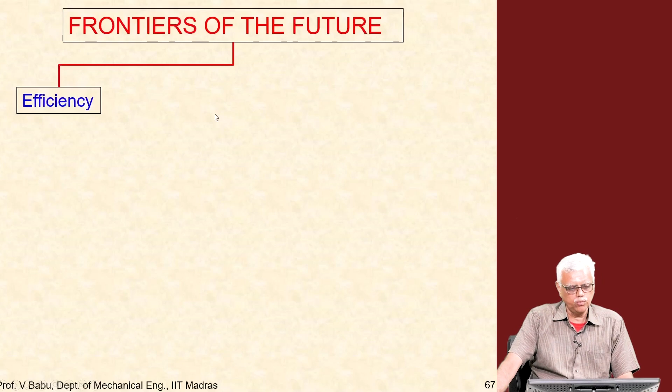What are the directions in which performance of these engines, reliability is being improved? If you look at the directions, there are two important directions. One is efficiency, and efficiency improvements are being sought in three directions. Let us take a look, then we will go through them.

Basically, efficiency improvements are being sought through better combustor designs and through weight reduction. These are the two most promising directions. We want better combustor design so that fuel economy is better, and perhaps emissions can also be improved. That is one front in which improvements are being sought.

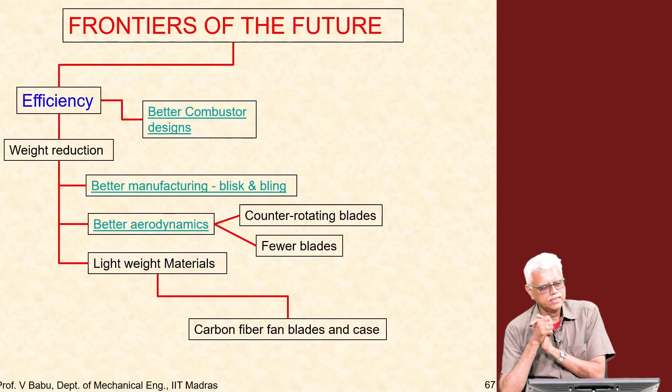The other front, of course, is weight reduction. You keep making the engine lighter and lighter, it becomes more and more economical to use the engine in the actual application. Weight reduction, as you can see, is being sought in three or four different fronts: first, better manufacturing; second, better aerodynamics; third, better materials.

It's quite interesting that these three directions essentially constitute the three verticals of mechanical engineering: thermal, design and manufacturing. That is where improvements are being sought.

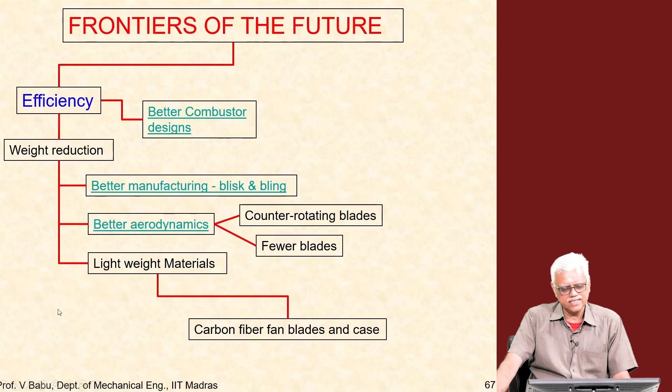So we will go through each one of these and see what the latest and state of the art designs are. The other major improvement is being sought in compliance. When I say compliance, two important things: one is emissions and the other is noise.

So the engines must have better emissions and also must be quieter, and the standards for noise keep becoming more and more stringent, because airports, although earlier they used to be outside cities, now cities are expanding so much that cities are growing around the airport, so noise requirements are becoming more and more stringent.

So these are the two major directions in which the industry is evolving: efficiency and compliance. And in efficiency, these are the aspects in which they are evolving. Let us go through them one at a time and see what improvements are already in place and what we can expect in the future.

If you look at better combustor designs, you may remember that I said the industry has now moved to annular combustors rather than the can combustors that were being used. This is one of the latest combustor designs being used in the Airbus A320neo type of aircraft with the new engine option.

This is the twin annular premix swirl combustor, which is extremely efficient. It boasts a 15% reduction in fuel consumption, consequently a 15% reduction in CO2, and a 50% NOx reduction also, compared with the earlier designs. Better mixing, better combustion, better control of the peak temperatures in the engine actually result in these kinds of benefits.

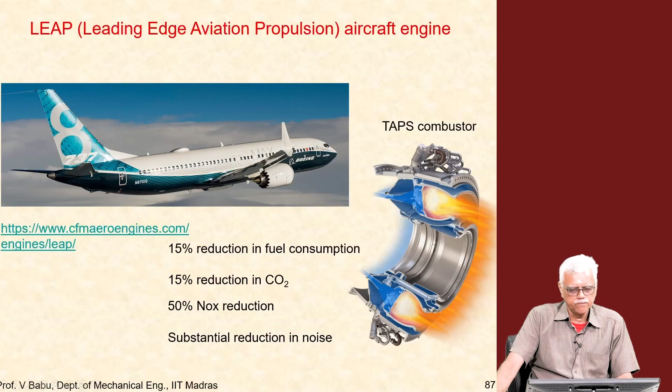Some of the interesting technology already in place in these combustors is the use of ceramic matrix composite materials in the combustor itself. Remember, the combustor also experiences high pressure and high temperature, but no rotation, which means the combustor also requires thermal protection.

It has a lot of thermal stresses, so the lining usually requires cooling, just like the high pressure turbine blades. The combustor liners also require cooling, and now they are being manufactured with ceramic matrix composites, which provide the biggest saving in reduction of weight as well as improved thermal capability. So they last longer and are lighter, making them most attractive for use in latest engine technology.

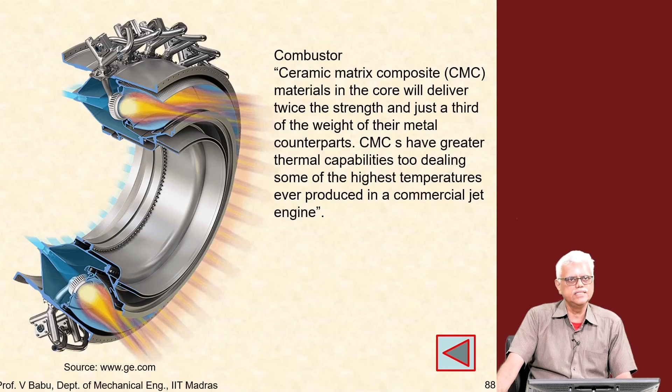So again, in the combustor, when we say combustors are being improved, it is not only in the combustion aspect of the fuel, but in the fabrication of the combustor itself, how we are able to achieve better improvements through the use of these kinds of materials, and improved mixing of the fuel, improved dilution of the air. All these things result in longer engine life and lighter components.

Now, if you look at weight reduction, this is probably one of the holy grails of aircraft engine manufacturing. The lighter the engine, the better it is. So it is being pursued on 3 different fronts, as I have shown here.

Let us look at manufacturing first. Here I have shown the conventional compressor, with the compressor disc and the compressor blades. You may recall that compressor blades may be mounted onto the disc in 2 different ways.

One way is to mount them axially, so the roots are axial. You have axial slots along the circumference of the disc, and each blade goes into an axial slot. The other way is to have a circumferential slot, where the blades are bolted onto the disc in the circumferential slot. So it is either axial mounting or circumferential mounting.

So here you see the conventional disc, which is then connected to the shaft, with the disc and blades mounted here. One of the latest manufacturing practices is to completely do away with this kind of mounting, which requires a root and then bolts to mount this onto the disc. All of this is weight.

So what is being done now is to use a component called BLISK. BLISK stands for blade plus disc, and this results in a 30% weight saving. What is done is you take the blades, and rather than bolting them onto the disc, you friction weld them onto the disc, resulting in about a 30% weight saving, which can translate into a substantial amount of weight saving.

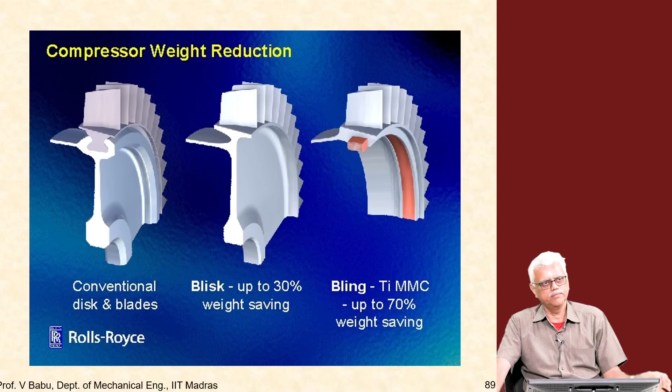Of course, better manufacturing practices mean the fan blades now are manufactured from composites, again using the resin transfer molding process. So the blades are now made out of carbon fiber, extremely lightweight and extremely strong.

And as this quote from the GE website or CFM website says, each blade is strong enough that you can hang an A350 or Boeing 787 from each blade and it will not budge. That is how strong these blades are, yet they are extremely lightweight.

They are all made of composites. One advantage, as we will see later on, is these blades are lighter, they are stronger, and the aerodynamics of these blades can also be better. So you have a double advantage when you improve your manufacturing practice and simultaneously improve your aerodynamics of the blade.

So the weight of each blade goes down, and the improved aerodynamics actually results in a reduction in the number of blades. The GE90, for example, will probably have about 24 blades, whereas the GE9X will have only about 18 blades or so. So the number of blades also goes down and the weight of each blade also decreases. You can realize tremendous reduction in weight using these kinds of improved manufacturing technology.

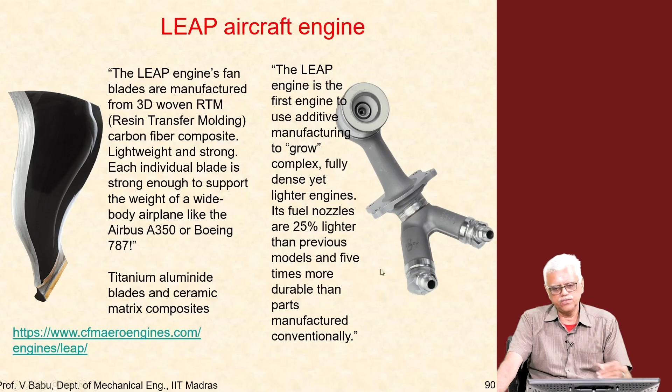The next one here that you see is a fuel nozzle, done using additive manufacturing. These parts are complex, very dense, but they are also very light. These are fuel nozzles used in the LEAP engine, and they have improved life and can also be mass produced. The manufacturing technology today is such that they can be mass produced with these very desirable properties, and these are actually in service as we speak.

Here we see turbine blades, although not in an aviation application, because this is an illustration of axial slotting. You can see the blades being mounted axially, whereas previously you saw circumferential mounting. So here you see the turbine blade.

This turbine blade is currently installed in a 13 megawatt gas turbine stationary power plant. You can see the hollow blades, where the air used for cooling comes in, and these blades are manufactured entirely using 3D printing. These are already in service. Siemens manufactured these blades, and they are already in service in one of the stationary gas turbine power plants.

So again, this technology, additive manufacturing, 3D printing, has come a long way, where we can now manufacture these kinds of complex components like the fuel nozzles or the turbine blades with internal cooling passages, with ease of manufacturing. A great deal of precision and intricacy can be maintained, along with durability and strength, and these components can also be mass produced. That is where we are headed.

These are all the special alloys that are required for manufacturing the turbine blades.

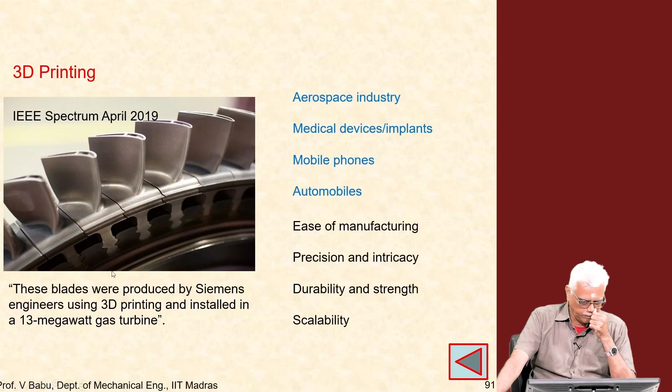So we now look at better aerodynamics, what has been done, for example, in the latest GE engine, the 9X. Some of these features are actually quite astonishing. These engines have an 11-stage compressor with a pressure ratio of 27 to 1, which roughly works out to a pressure ratio of about 1.4 or 1.5 per stage, which is quite high, and an overall pressure ratio of 60 to 1. Earlier engines used to have, or even smaller ones still today have, ratios of 40 to 1, which is considered quite high, but now the bigger engines have gone to pressure ratios of 60 to 1 to improve thermal efficiency.

So the thermal efficiency of the engine depends, in some power, but generally depends on the pressure ratio and the peak temperature of the engine. The higher both of these are, the more efficient the engine will be.

So a lot of work has gone into designing the compressor blades and stages to make them more efficient, better resist compressor stall, and so on, much more compact. As the aerodynamic efficiency increases, the number of stages will also come down. As the number of stages comes down, you can remove a set of rotor blades numbering probably 100 or so, and a set of stator blades again numbering 100 or so, and the weight comes down.

So small gains in the pressure ratio in one rotor blade passage will translate into large gains in terms of large savings in weight.

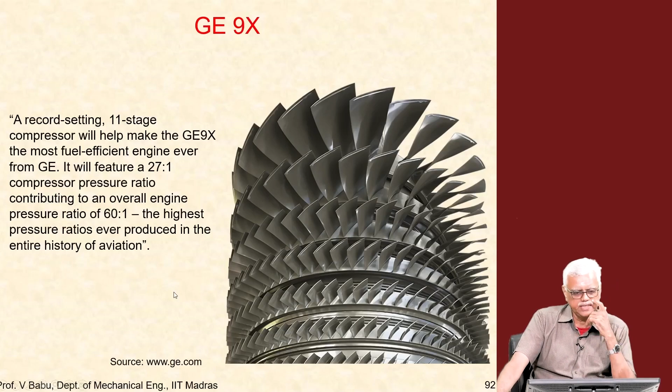So turbomachinery is an extremely critical and important aspect of aviation engines. The other thing, as I mentioned, the fan blades, not only are they being made with composites now, the aerodynamics of these blades is also much better now. Because they are much more efficient, the number of blades required for a given amount of thrust will also decrease with improved aerodynamic efficiency, again resulting in weight savings in the overall engine compared to the titanium blades that we saw earlier.

The titanium blades generally are bigger, and the composite blades are lighter and much more efficient today. This is what is used in most of the big engines, whether GE or Rolls Royce. Most of the biggest engines use composite fan blades, and now even the medium bypass ratio engines have started using this, because the weight gains translate into tremendous savings in fuel. That is the most important consideration.

As you can see, the blade profile is highly complicated, because if you remember the velocity triangles I showed, the relative velocity goes from being subsonic at the root to supersonic at the tip.

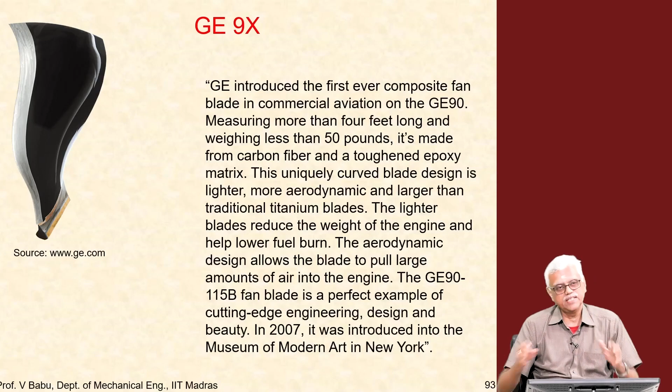Then there are performance improvements in the low pressure turbine. Of course, all this information has been sourced from GE - I am merely reproducing it here for your knowledge.

Again, the low pressure turbines have a lot of aerodynamic improvement, because if you remember, the low pressure turbine is the part of the engine where it really increases in size, as the flow is expanding a lot. So as the engine increases in size, the circumference increases and the number of blades increases. Any improvement in aerodynamics here will result in a lot of weight saving, because each ring of blades will typically have about 200 to 250 blades.

So even small improvements in aerodynamics, if you can remove one stage, will result in tremendous savings in weight. A lot of work has gone into improving the aerodynamics of the low pressure turbine and also reducing the weight, because there are so many blades. Reducing the weight of each blade also results in significant savings in weight.

So the blades are now made of titanium aluminide, which I understand is a metal matrix composite blade. A lot of weight has gone down - as you can see here, about 400 pounds, which works out to about 200 kilograms of weight saving per engine. That is a lot of weight to be carried.

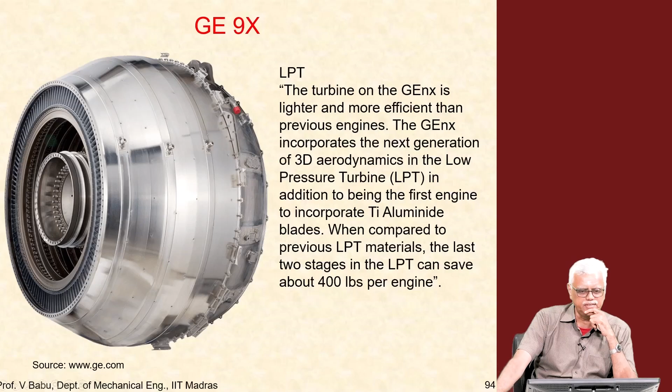So a lot of interesting technology is already in place - this is state of the art. Actually, the video here summarizes some of these things. I will highlight a few more things as we go along.

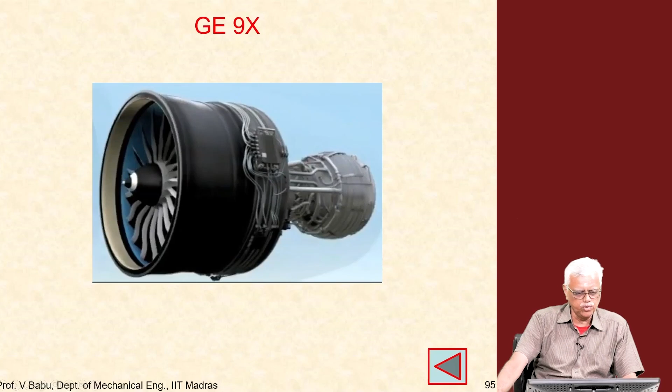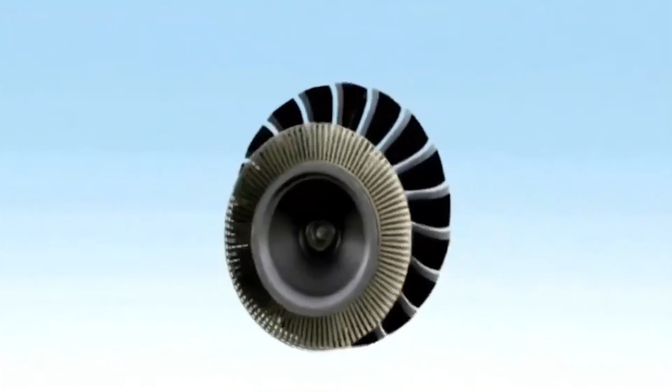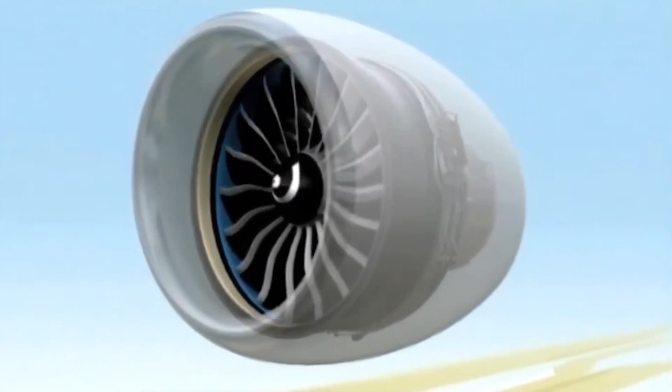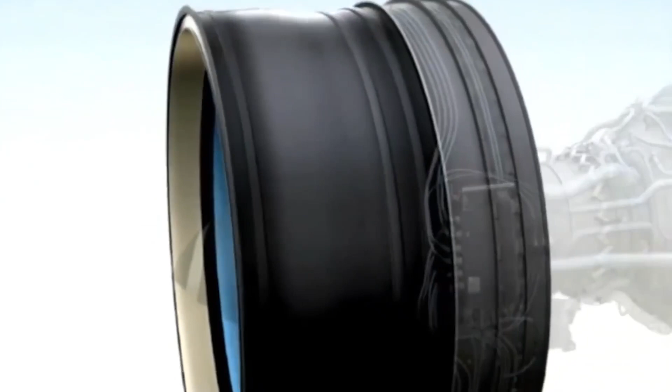Designed to power the next generation of long-range aircraft, the GEnx is the most advanced commercial turbofan in our history. A culmination of more than 60 years of inspired design, the GEnx refines the best technologies and systems of our successful engine families to deliver a whole new level of performance for aircraft such as the Boeing 787 Dreamliner. Let's take a quick look at some of this engine's most striking innovations. One unique feature that sets the GEnx apart is its expanded use of composites in the fan module. These materials are light, durable, and incredibly strong, and have been proven in service on GE90 fan blades. We have extended our success with these materials to the GEnx fan case, making it lighter and more durable. Aft of the fan is the low-pressure compressor. As with many components in the GEnx, it incorporates the latest 3D aerodynamic improvements, as well as a debris-rejecting system to keep foreign material from entering the compressor.

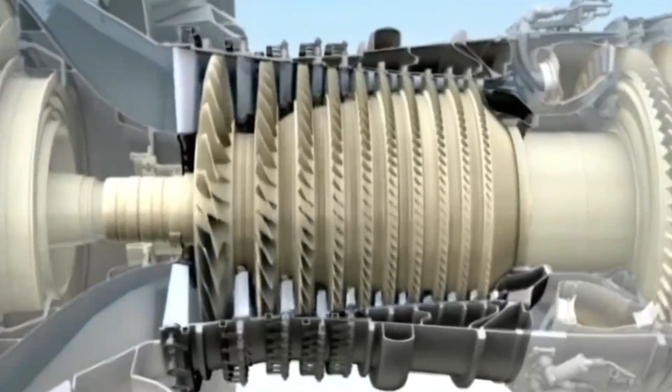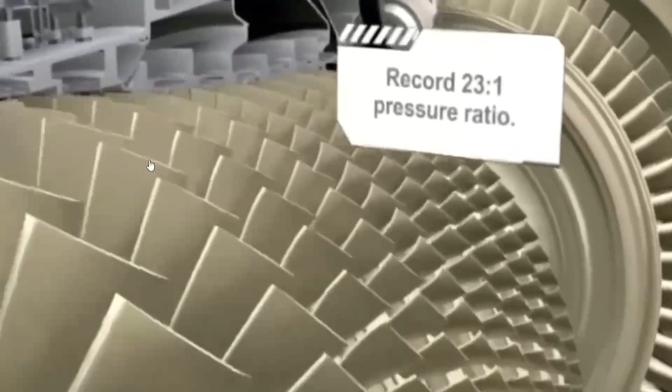It features a 10-stage high-pressure compressor that uses 4 fewer stages than the engine it replaces. Fewer stages mean fewer parts and lower cost. This efficient compressor delivers an astounding 23-to-1 pressure ratio, while providing the same stall-free operation GE is known for.

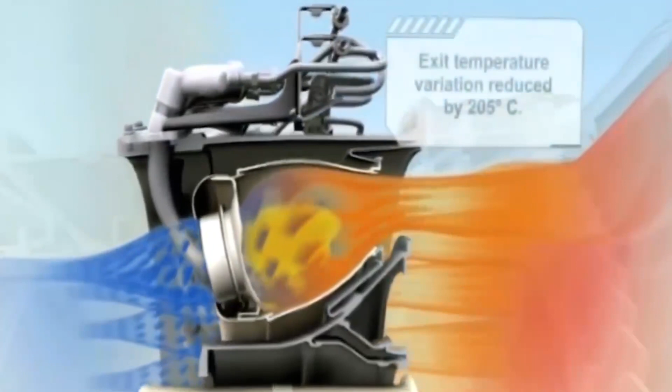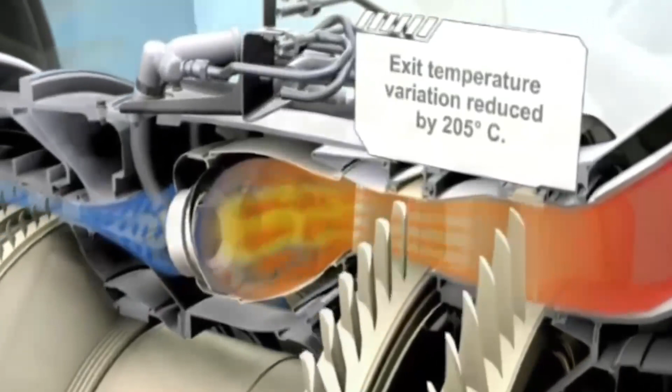If most combustors operated at the record pressures inside the GEnx, the flame temperatures would be unacceptably high and would not keep NOx generation at low levels. Not so with the GEnx, which features an advanced TAPS combustor in development since the year 2000. This combustor keeps temperatures low by utilizing lean burn combustion and a more uniform gas stream temperature profile, reducing the thermal impact on downstream hardware.

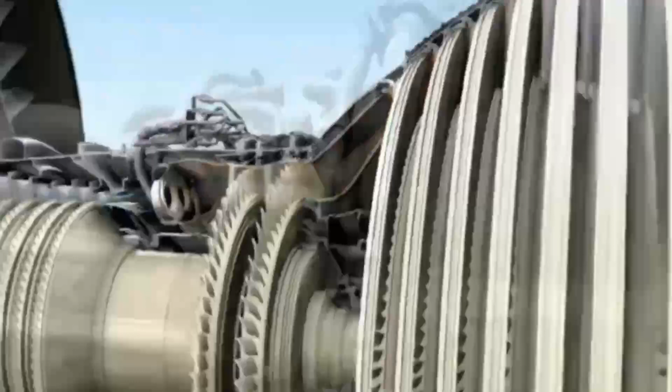Turbines extract energy from the core flow. By utilizing our advanced design codes, fewer blades can now do more work.

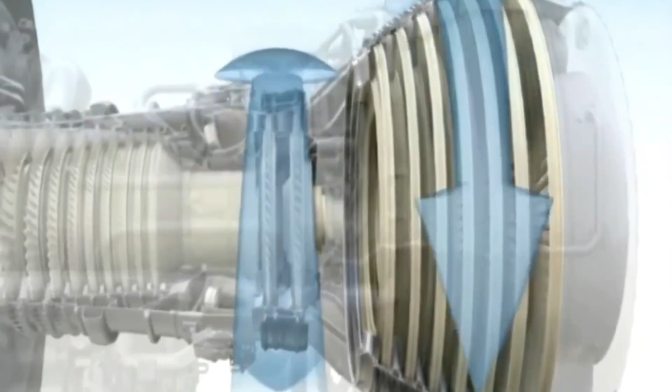In addition, a counter-rotating... so this is very interesting, I will mention this later. One of, probably in addition to a lot of inspirational design changes on the turbomachinery side, this is actually very interesting.

Notice that the GE engine has 2 shafts. One is the N1 shaft which is connected to the fan, the other is the N2 shaft. So this is the N1 shaft, this is the N2 shaft. Notice that the N1 and N2 shaft rotate in opposite directions.

This is very important, because each rotor stage can accomplish only a certain pressure rise, because if you make it too high, the flow will separate and you will have compressor stall. So for the flow to go smoothly from one rotor stage to the next, you need a set of stator blades which will accept the flow from here and divert it so that it enters the next rotor stage smoothly. Flow has to be redirected.

The stator plays only the role of redirecting the flow, but it also adds to the weight. What is interesting is, if the rotors rotate in opposite directions, then the redirection is not required. It will automatically go smoothly from one to the next. You can arrange it so that it goes smoothly from one to the next. If you look at the velocity triangles, you can see how that happens. Here, by doing this, they have eliminated one entire stage of stator blades, and more perhaps. So the reduction in weight is substantial. That is what the counter-rotating blades offer.

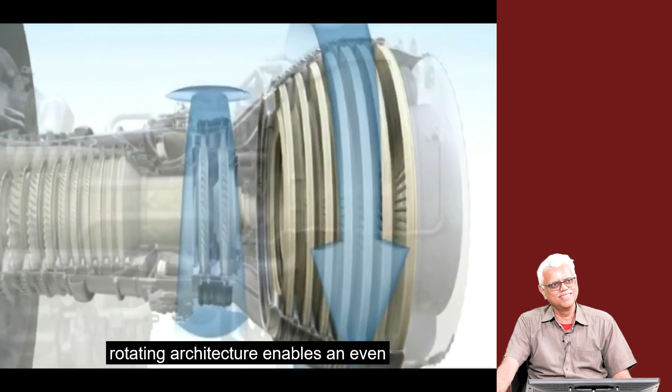That is a very significant advancement in turbomachinery design, which is also the reason why we have not been able to recruit faculty members with specialization in the turbomachinery area. They are all taken up by the aircraft industry.

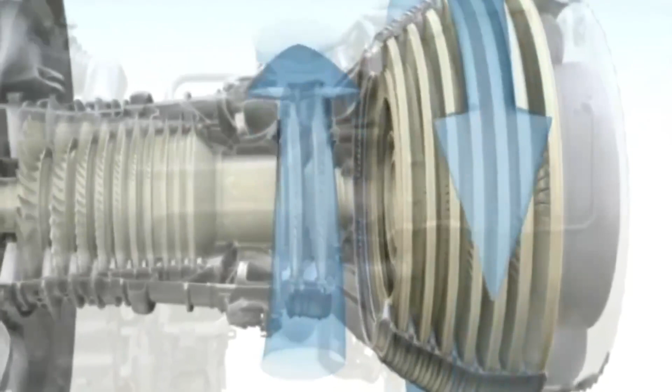This architecture enables an even more efficient extraction, allowing for a 10% part reduction in select stages. All of these technologies have come together in one engine, providing maximum value and operating efficiencies, making the GEnx a standout among aircraft engines. Even when it's in the air, the GEnx is under the microscope.

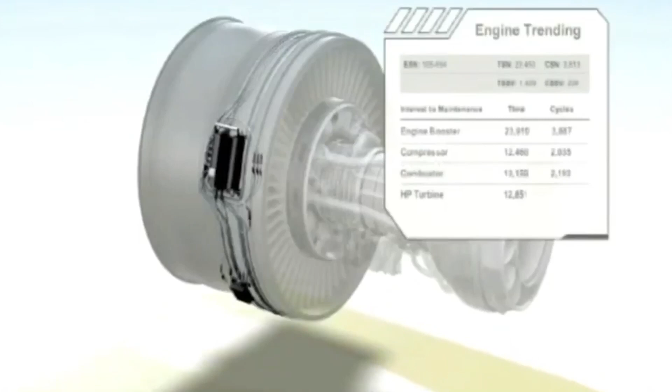By using integrated diagnostic technology, the engine can monitor its own condition, diagnose faults, and track performance history - all critical data for optimizing engine value. When this engine has to come off wing, it employs an innovative modular maintenance concept designed to deliver significant savings in time and cost.

The engine easily splits into 2 modules, the fan and the propulsor. When the time comes for maintenance, the propulsor can simply be removed and replaced with a spare one.

The GEnx is a giant leap forward. It takes advanced, proven technologies and combines all of them into one efficient, reliable turbofan. It is the first great engine of the 21st century. It is imagination at work.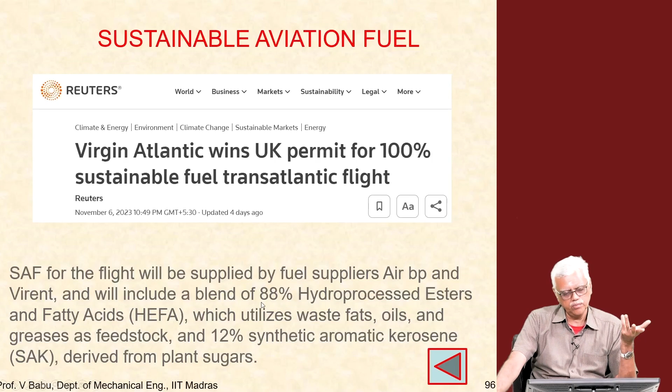If it is possible to generate large amounts of fuel, apparently these companies Air BP and Virent have the capability to supply large quantities of the fuel. So this will actually mean a leap forward in having sustainable fuels. Hopefully it will result in reduction of emissions also, but there is a long way to go in reducing emissions from aircraft engines. The fuel economy improvements have been very good for the aircraft industry, but still a lot of work needs to be done for improving emissions.

On the noise front, propellers are very noisy due to mechanical reasons. Turbojets were extremely noisy because the entire thrust is generated by the jet, which generates a lot of aerodynamic noise as it mixes with the air. Turbofans are quieter compared to turbojets because 75 to 80% of the thrust is generated by the fan stream, which does not generate so much noise as the turbojets, but still they generate a lot of noise.

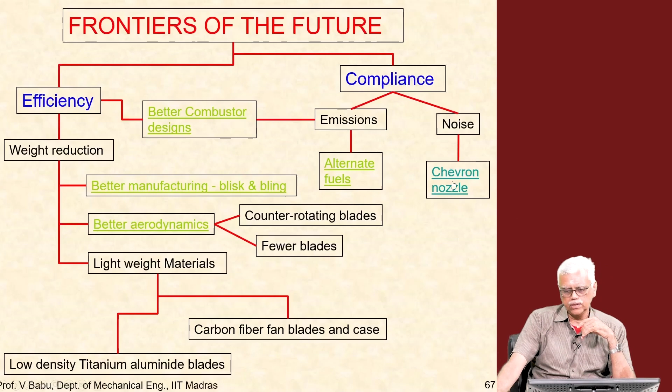One way of reducing noise used in these engines is the so-called chevron nozzle. By having chevrons in the trailing edge of the fan nozzle, and you can also have them in the trailing edge of the core engine nozzle, this reduces the mixing noise considerably. This is a very interesting fluid dynamic aspect that is used.

You have to be very careful with the chevron design. There are many different things that are possible. Basically the chevrons are triangular cutouts from the trailing edge, so you have triangles, then a cutout, next triangle, and so on.

The basic design parameters of the chevron are the chevron length and the chevron angle. The chevron orientation can coincide with the nozzle itself, or you can slightly make it protrude into the nozzle stream. So you can have chevron length, chevron angle, and the number of chevrons along the circumference. These are the parameters that control the performance of the chevron.

Depending upon combinations of these parameters, the chevron can actually make the engine noisier, or for an optimum combination it can make the engine quieter. We have studied the aeroacoustic performance of the chevrons. One of my PhD students studied that, and we elucidated the fundamental mechanisms of noise reduction by the chevrons. It is a very interesting concept, and there are some optimal combinations which can result in noise reduction by as much as 50% or so. That is why it is quite extensively used in aircraft engines nowadays.

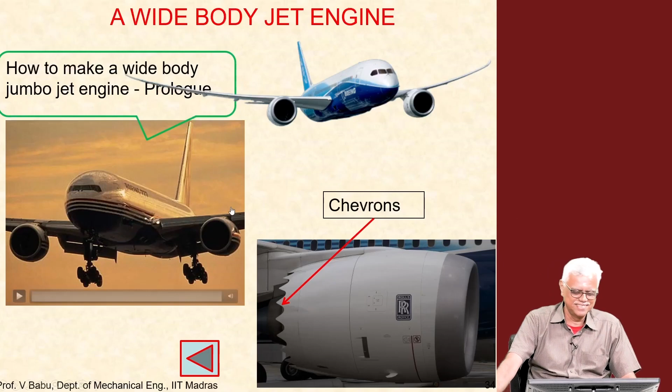Okay, so now we are looking at future technology. What is in the pipeline, what we can expect maybe in the next 5 to 10 years. Of course aerodynamics is not within the scope of our discussion, but I still thought this would be interesting to show based on what we have seen. The Boeing 777X is an aircraft currently being developed, probably coming into service maybe 5 years from now, that is generally what is expected. Now, as I said, we have completely done away with 4-engine and 3-engine airplanes. Now all the aircraft, both single aisle and two aisle, have only 2 engines. Different versions of this aircraft increase capacity by stretching the aircraft rather than making them bigger.

So you are stretching them, but even then there is a demand for making them even bigger, not to the extent of making two decks, but still it will be better to have more efficient, longer range, ultra long haul flights. In that sense, Boeing has come up with this very interesting aircraft, which has folding wings, which is very interesting.

The 777X will still be accommodated in the same gate as it is now when it's coming down, but when it is in flight, it has longer wings, hence a longer range, and can carry more people. So we can take a look at this technology, it's quite interesting. Let us see. I did a screen grab from this.

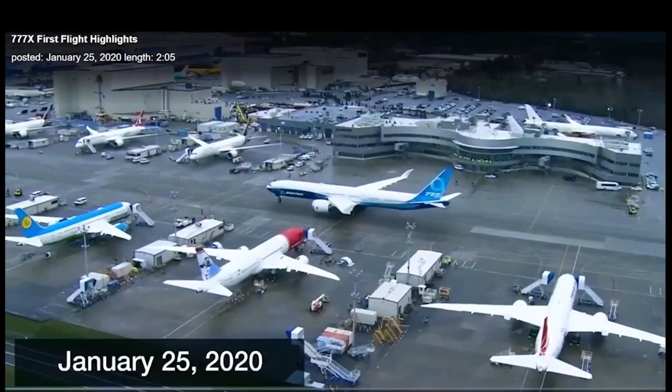Hello to all of you guys watching on Boeing.com. We are live in Everett, Washington, just north of Seattle, for the Boeing 777X first flight. It looks like the skies are gray today, but today the conditions are a lot better. There were about 8,000 employees joining us yesterday on the flight line here. It's unfortunate we weren't able to fly yesterday, but safety is a priority here at Boeing. As you mentioned, it's looking a lot better today.

Already 8 world-class customers have purchased this aircraft so far: ANA, British Airways, Cathay Pacific, Emirates, Etihad, Lufthansa, Qatar, and Singapore. A huge thank you.

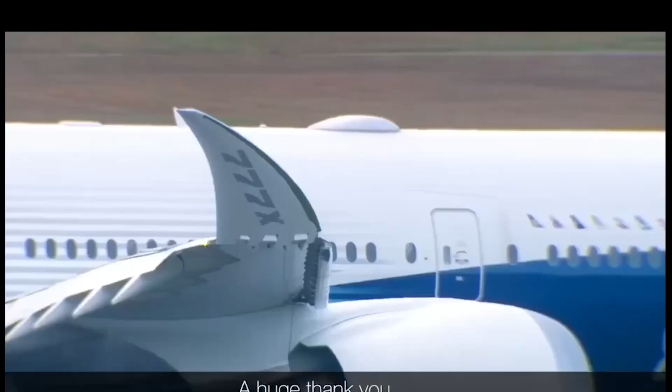As the aircraft goes onto the runway, the folded wings come down, so it has a longer wing. Until then, it should have a folded up wing so that the wingspan is the same.

This is spectacular. I'm proud of all the employees that put their heart and soul into this. It takes an effort across the company. The 777X, with its long range capability and increased capacity, is going to really change the world one more time.

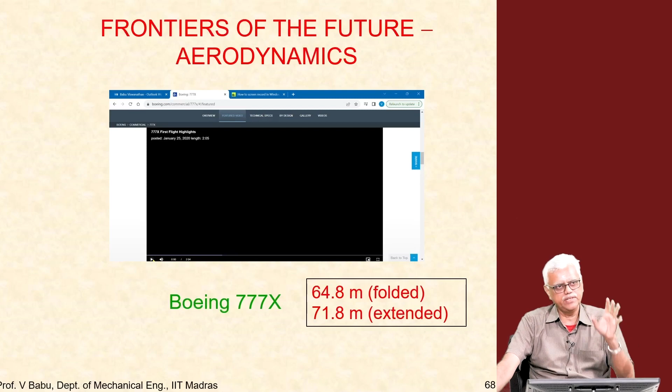Now you can see the wings folding up again, as you can see here, so it meets the gate requirements. The wingspan is actually 64.8 meters, same as the existing 777, but when it is extended, it increases in length by about 7 meters or so.

Go ahead, Nasim. There seem to be some things which are permanently there. That is in the 737, those are called winglets. Winglets improve the performance of shorter wings, but Boeing does not use winglets in bigger aircraft like the 777 and 787. I don't know, maybe Airbus does.

Instead, they use what is called a raked wingtip design, which gives a much better aerodynamic performance compared with the traditional design. But the 737 and the Airbus A320 have winglets which, if my memory serves me correctly, reduce the overall drag by about 5 to 6%, which is considerable for an aircraft of that size. It can result in substantial fuel savings.

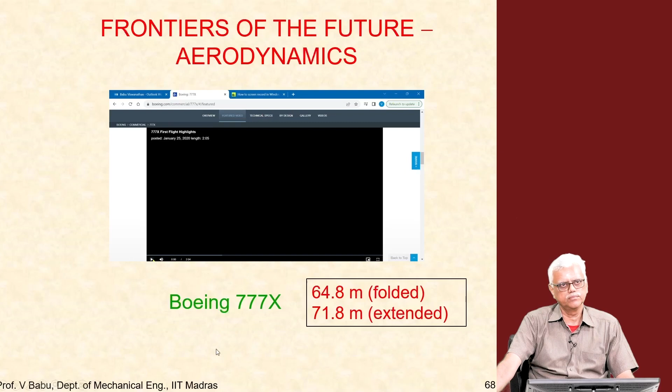So on the engine side, on the propulsion side, what can we expect? If you look at the trend so far, we started with turbojets, then a zero bypass turbofan engine, then low bypass turbofan engines, and then high bypass turbofan engines. Now we are at very high bypass ratio turbofan engines. The GE90 and other engines typically have bypass ratios of 12 or so. So the way the trend is going, it seems we keep increasing the bypass ratio, and next we will go from very high to ultra high bypass ratio engines.

But the downside is very nicely captured in this graphic below. As you increase the bypass ratio on the x-axis, you can see the drag comes up - the frontal drag goes up, thrust capability and weight change, and integrating the engine with the airframe becomes very difficult, causing structural difficulty, and weight also increases. So there is a lot of downside beyond a certain point.

However, on paper, at least in theory, as you increase the bypass ratio, the thrust specific fuel consumption becomes better, and the noise also becomes better as we go along. So on paper it is desirable to keep increasing the bypass ratio, perhaps go to ultra high bypass ratios, but in implementation you encounter difficulties once the bypass ratio goes beyond a certain value.

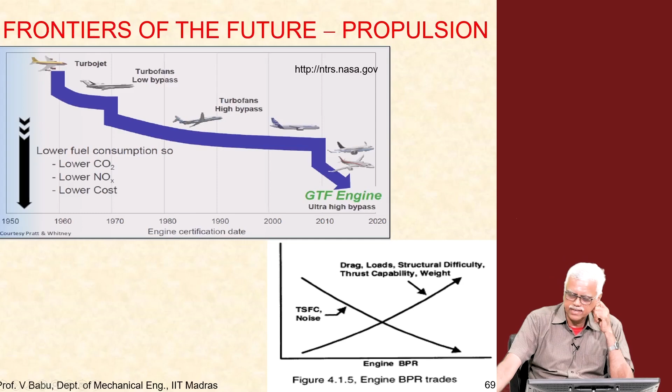We probably are at the limit of that value now with our aircraft. So, the next improvement, or paradigm shift, that is required is to go to what is called a geared turbofan engine. The idea behind that is something we will see, but before that, let us take a look at the effect of bypass ratio. As you keep increasing bypass ratio, what sort of difficulties will you encounter in actual aircraft?

I have picked the Boeing 737. This is the Boeing 737 original with the turbojet engine. We are basically going through the same sequence we saw in the previous graphic, what happens as the bypass ratio increases. Here we have a turbojet with zero bypass ratio, and you can see the engine underneath the wing, with the exhaust coming out of the trailing edge of the wing. So you can see how the trailing edge of the engine coincides with the trailing edge of the wing, and the exhaust comes beyond the trailing edge of the wing. That was how engines were mounted in those days, turbojet engines with zero bypass ratio.

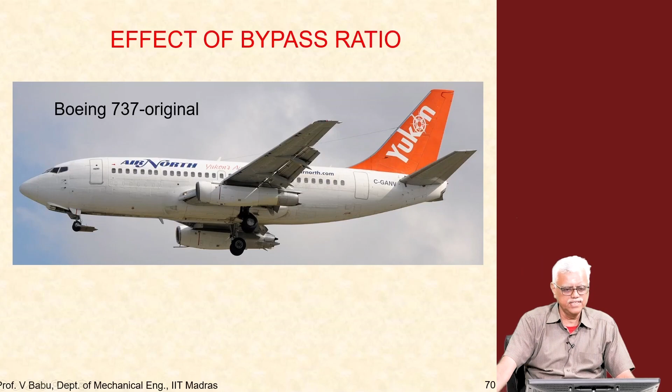Now, as the bypass ratio increases, the engine becomes bigger, so it can no longer sit underneath the wing. This is the next one, the Boeing 737 Classic. Now you can see how much the engine has come out. The engine has moved forward, and the trailing edge of the engine was even forward of the leading edge of the wing. Earlier, the trailing edge of the engine was in line with the trailing edge of the wing. Now the trailing edge of the engine is even further forward compared to the leading edge of the wing itself. That is how much it has moved forward, and that is inevitable when you have a high bypass ratio engine.

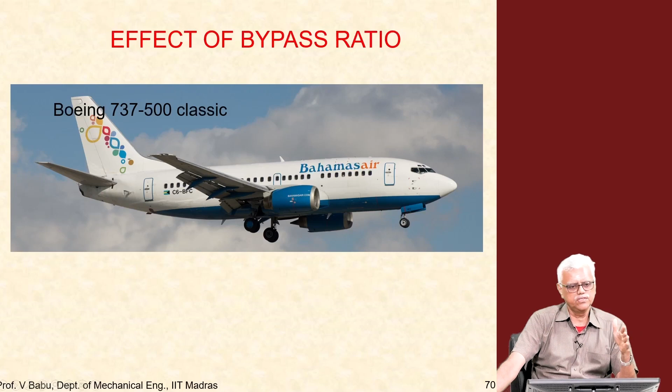This is actually a mid-size, narrow aisle, single aisle narrow body aircraft, but even here we now have medium bypass ratio engines which are reasonably big. So this has come forward. We went from Boeing original to Classic. The next one is the so-called Boeing NG, next generation. Here the engine is even further forward compared to the Classic. You can see how much it has come up, and the NG also features winglets for improved aerodynamic performance.

In fact, this engine is so far forward that the GE engine would not meet ground clearance requirements. So the bottom of the fan casing had to be flattened in order to make the GE engine meet ground clearance requirements, because the airframe is the same. For the 737, Boeing has not really changed the airframe since the original. The original airframe sat low to the ground, because in those days baggage had to be handled manually. The belly of the plane opens up and baggage handlers take the baggage out and load it on carts. It was very good, but today it is not done like that, though the airframe remains the same.

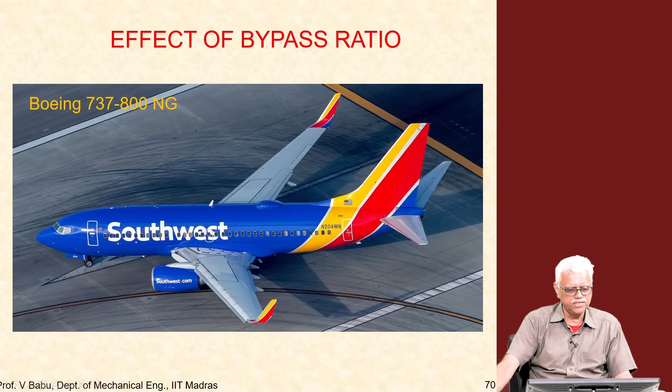So when that happens, you have other constraints like this. Now the latest one, 737 MAX, the engine is even bigger than the previous ones and farther forward compared to the other one. The engine keeps moving inboard and then keeps moving forward. I am showing this to illustrate what can happen when you increase the bypass ratio. On paper, increasing bypass ratio is very desirable, but integrating such engines with the airframe becomes very difficult. Practical challenges like this make it very challenging. You can also see chevrons even in these types of engines nowadays.

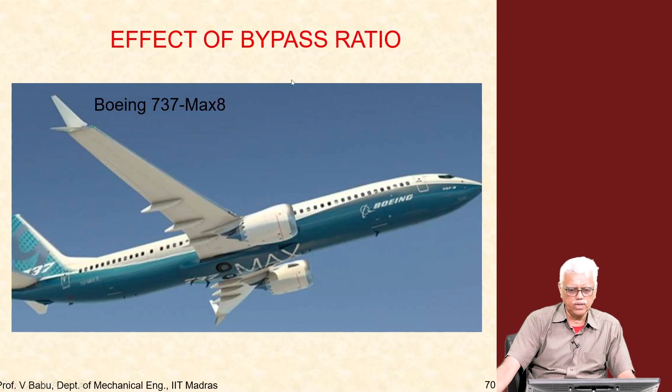So those were the considerations which led Boeing to choose this engine and then choose this sort of integration with the airframe. But the problem is, when you have such a big engine so forward and so inboard, aerodynamically there is a tendency for the aircraft to always pitch up, because it is producing so much thrust and is so far forward, there is always a tendency for the nose to come up.

This was noticed during test flights, and so Boeing designed a software called MCAS, Maneuvering Characteristics Augmentation System, which would automatically adjust the trim tabs to keep the aircraft in level flight.

But the problem is the software does it automatically, and there are times, especially when you are taking off, when you want the nose to be up as it climbs. So that's where this got into problems. The software tries to push the nose down at the wrong time, because it senses the nose is too much up, and then the pilots are trying to pull up the aircraft, and there is a problem. You are not able to disconnect it, and you are also close to the ground, you don't have altitude to work with, and eventually this led to 2 of the crashes that we saw, and the Boeing 737 MAX being taken out of service.

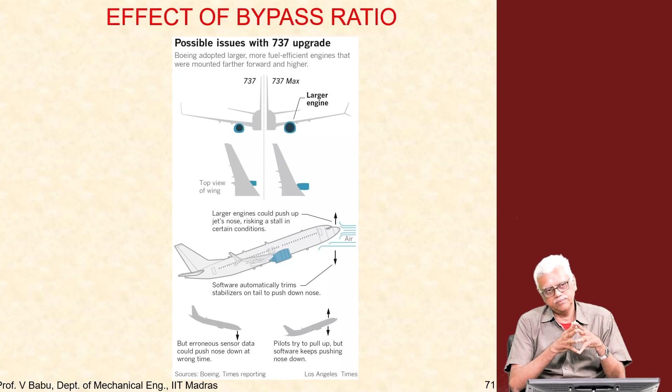So this is the effect of bypass ratio. On paper, it may sound great, but in practice, integrating such designs into aircraft becomes more and more difficult, which is why the industry's tendency to go for higher and higher bypass ratios, in my opinion, has probably hit the limit. I don't think we can go with current engines to increase the bypass ratio further.

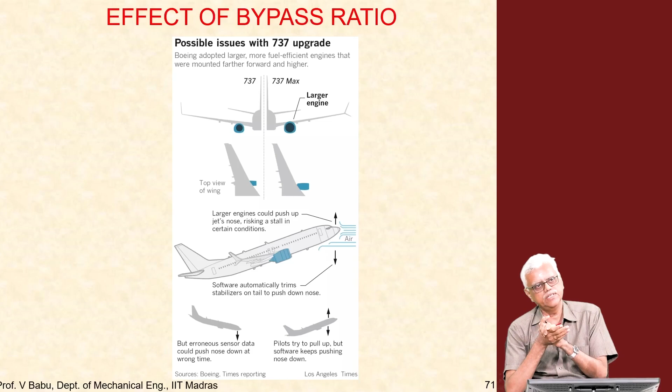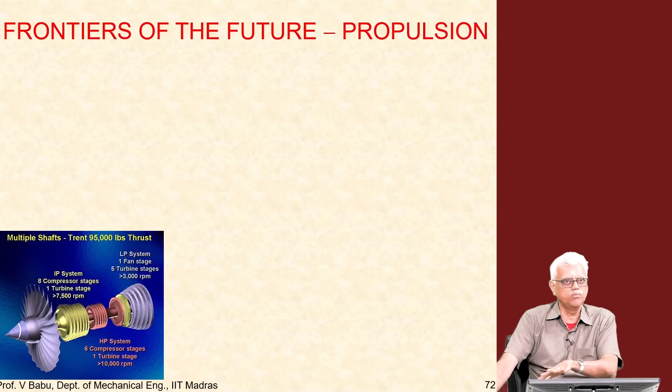So where do we go next if you want to reduce the speed further? The only way to do it is something someone already suggested - why not have a gearbox between the low pressure turbine and the fan? That technology is called the geared turbofan technology. So you have a gearbox between the low pressure turbine and the fan alone.

So basically what we have today are the so-called direct drive turbofans, because the fan is directly coupled to the low pressure turbine without any gearbox in between. Now you put a gearbox between the low pressure turbine and the fan. The low pressure turbine can actually run at a higher RPM, which would be more optimal. So the disadvantage of the direct drive is the fan is spinning at a speed faster than its optimum speed, and the low pressure turbine is spinning at a speed less than its optimum speed.

So by using a gearbox, you can allow the low pressure turbine to operate at its optimum speed, and the fan also to operate at its optimum speed. If you do that, the fan efficiency increases, so you can actually have lower fan pressure ratios. For the same performance, for the same thrust generation, you can have lower fan pressure ratios, and you move up on this curve in terms of efficiency, and you go to the left in terms of fan pressure ratio. So for a given thrust, you can have lower pressure ratio, or for the same pressure ratio, you can generate more power.

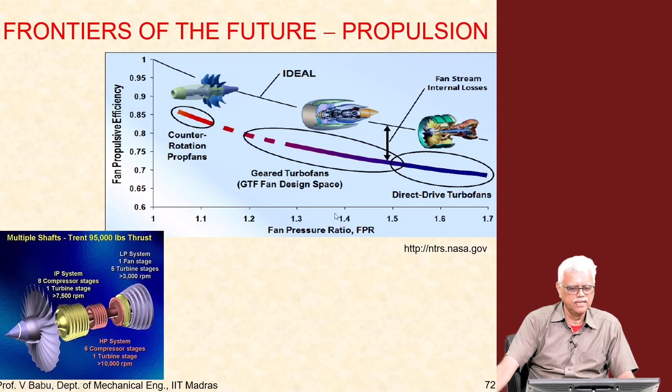So that is what a geared turbofan would allow you to do, but it is still very challenging.

For example, because the fan pressure ratio decreases and the fan efficiency increases, the fuel burn will probably go down by 20 to 25%, maybe around 20% compared to today's engines. This is because the amount of fuel you burn for a given thrust generation will go down due to the increased efficiency of the geared turbofan. The noise also goes down because it is now spinning at a lower RPM. The fan produces the maximum noise, and fan noise is actually among the highest contributors to noise from a turbofan engine, so that will also go down. So you get better compliance, both for emissions and for noise, if you use the geared turbofan.

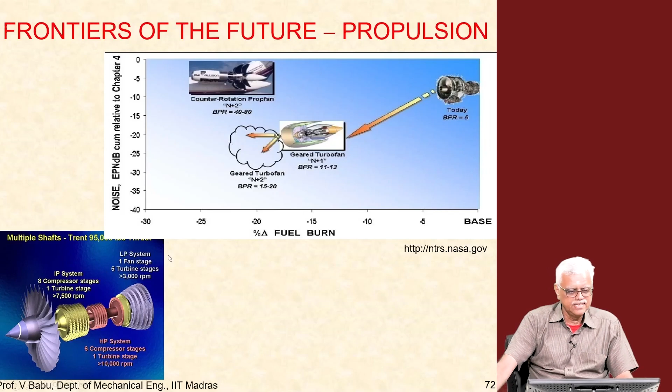The fan now spins at a slower speed compared to the earlier direct drive turbofan. Because the RPM is less, you can actually have higher bypass ratios, increase the diameter, and even with the increased diameter, because the RPM is less, you can still have low tip speed, and you can also have low pressure ratios because the fan efficiency goes up. The fan efficiency goes up, we can have low pressure ratios, and we can also increase the diameter because the fan RPM has come down. So this is cutting edge technology that is being used today.

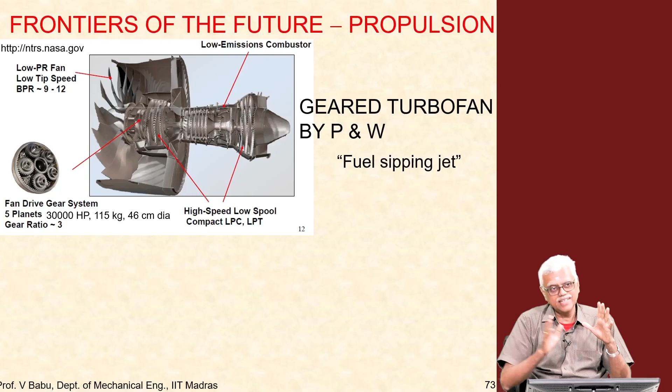Although I must add that Pratt & Whitney has put this engine in service, and interestingly enough, although the engine has been having a lot of issues, a lot of off-wing issues, all kinds of problems, apparently none of that has to do with the gearbox - which is what one would think to be the most vulnerable, right. None of the issues these engines have has to do with the gearbox, at least as far as I can read today. The problem is all elsewhere in other parts of the engine, but nothing in the gearbox, which I find extremely impressive - how you can have a gearbox like this and still have a noise benefit. I do not understand this particular technology, but I can understand why the geared turbofan will work better, although not how it has been accomplished in the actual engine.

So most of the Indigo aircraft in service today use the Airbus A320neo with the Pratt & Whitney engine, which supposedly gives a 30% fuel burn advantage for these aircraft.

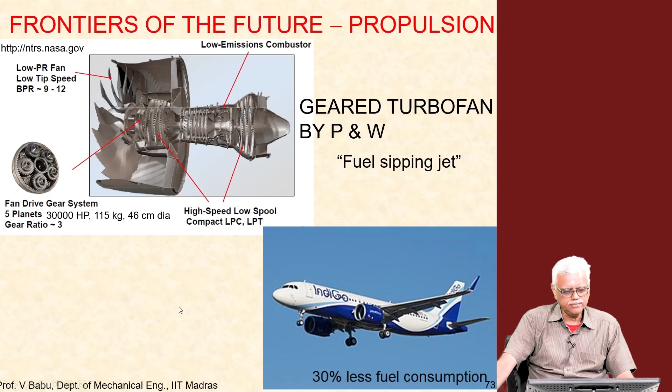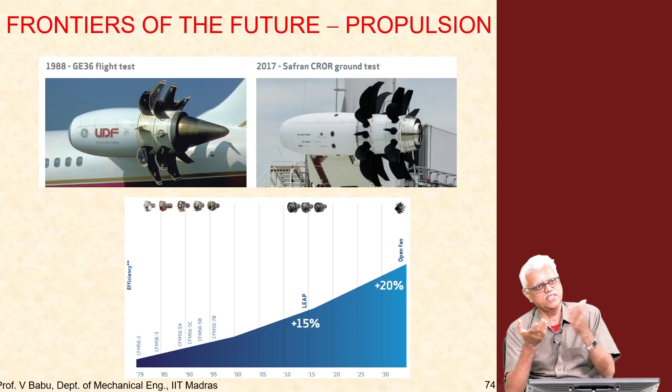We are going back to this because technically on paper it has a bypass ratio of almost infinity, or something like that. These engines typically have a core turbojet engine here, as you can see, with bypass ratios probably around 50 or 60, very ultra high bypass ratio. But we are going back to this sort of architecture because of the improvements that have been made in existing engines.

Remember we talked about better aerodynamics, better manufacturing practices, better materials. All those improvements have now been brought into the open rotor architecture that you see here. So these blades are made of composites, they have better aerodynamics, and so they are less noisy. It is counter rotating.

The counter rotating architecture reduces the aerodynamic noise tremendously. These blades would still be very noisy with only one rotor, but with counter rotating rotors, the flow goes through the first rotor and undergoes a change in direction, then the second rotor rotates in the opposite direction and straightens the flow back again. So it produces increased thrust and also less noise with the counter rotating. The aerodynamic noise decreases as you do this.

So it is supposedly quieter, but in terms of efficiency and fuel gains, the LEAP engines we talked about give about a 15% advantage compared to earlier architectures. Now, we supposedly have from the LEAP engines a 20% improvement in efficiency, depending on what metric you are looking at, whether it is fuel, emissions, or noise, whatever metric you choose, you get about a 20% advantage with the counter rotating open architecture.

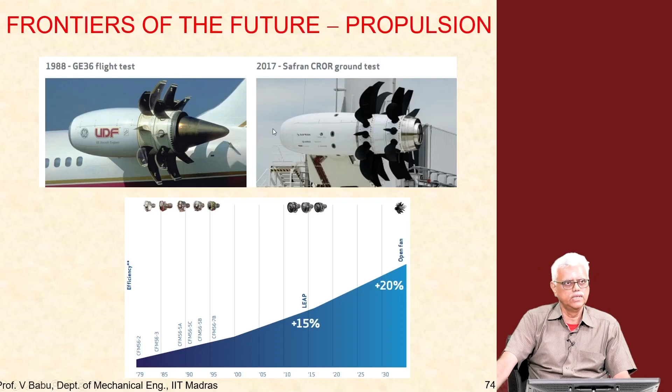I think this is very relevant for mechanical engineers, so I think this is very important. So that brings these lectures to a close. I hope it was informative for all of you.